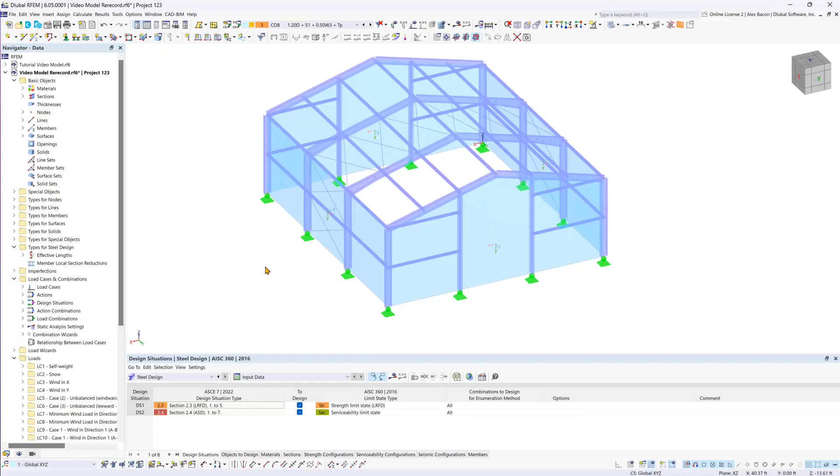To gain a better overview of the individual design situation types, jump to the steel design table and select the input data from the subcategory.

In this table, you can find all the design situations used for steel design. RFEM automatically assigns the correct design type to each situation.

The second tab displays elements that were automatically selected based on their assigned materials and sections. Individual components can be excluded from the design if desired, as well as the design all checkbox can be unchecked and individual elements can be selected for design.

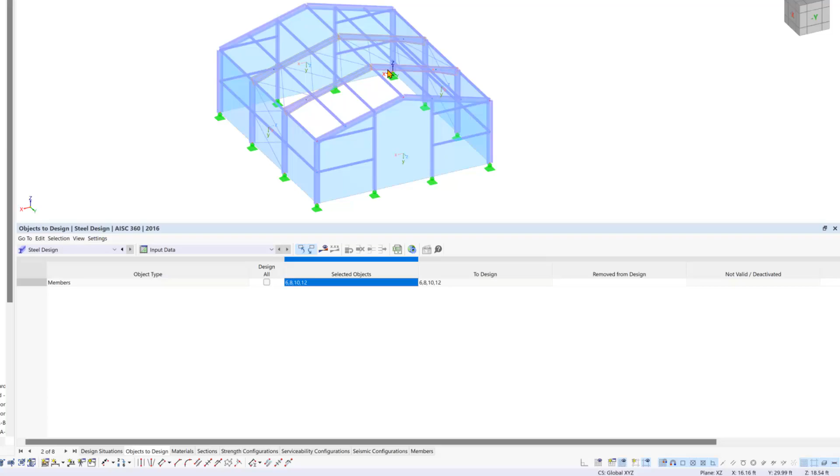As you can see, we already have our 4 internal beams selected. We can also click on the cell here and the select member and graphics button will pop up, and we can select our other 4 columns.

The tabs for materials and sections show relevant data for steel design, which we can skip if not needed.

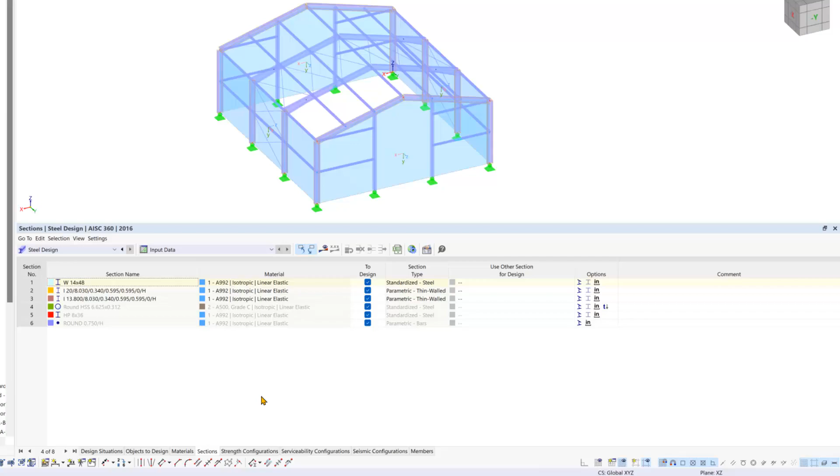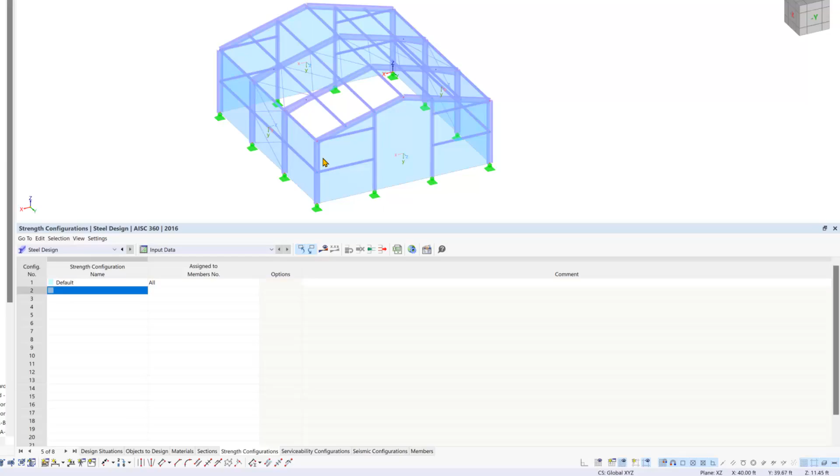In the following tabs, we encounter another innovation, which is the RFEM 6 design configurations. Now you can assign ultimate and serviceability configurations or both to specific structural components without creating a new design situation. To do this, all you need to do is edit the desired members and go to the Design Configurations tab.

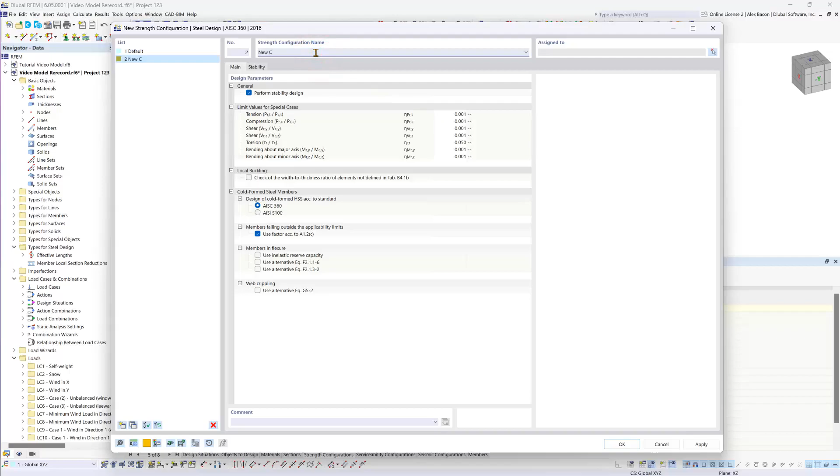Here is where you can create a new strength configuration. And then we can simply confirm the dialog box to create the new configuration.

Now you will see this in the tables. You can find and manage the configurations in the Members tab. And then you can also see which members this configuration is assigned to.

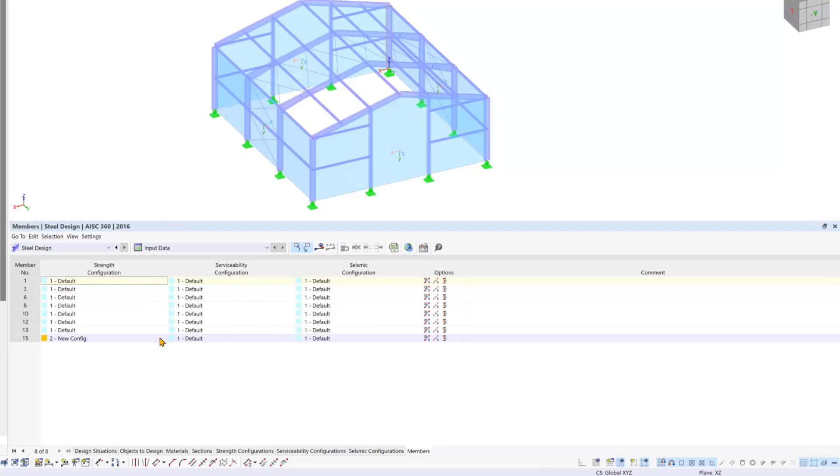This concludes our exploration of design situations and design configurations. In the next video, we will run the design calculation and dive into the results. Until next time.